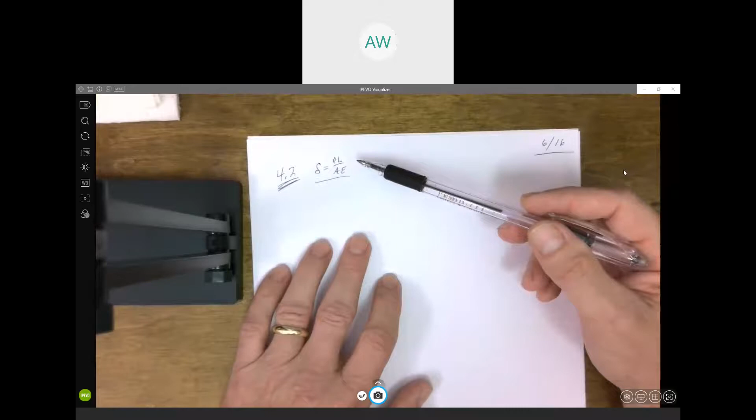All right, so now let's get back into mechanics and materials. This would have been Friday of last week before the test. In section 4.2, we were revisiting axial deformation in axially loaded members, and we came up with this formula: Delta equals PL over AE. That would be the axial or longitudinal deformation in an axially loaded bar. P is the axial load, L is the original undeformed length, A is the cross-sectional area of that member, and E is the modulus of elasticity. That's dependent upon the material.

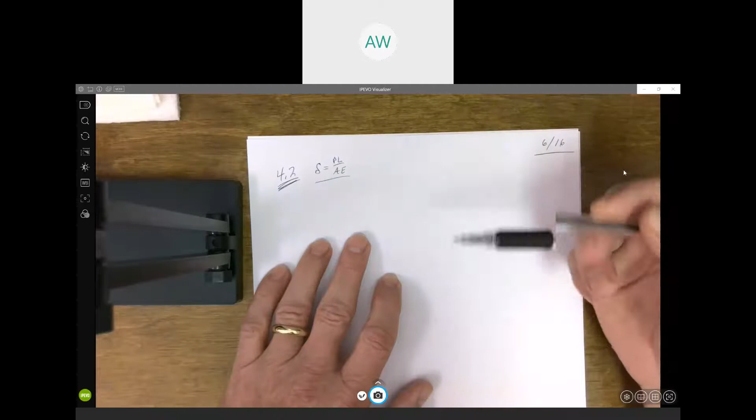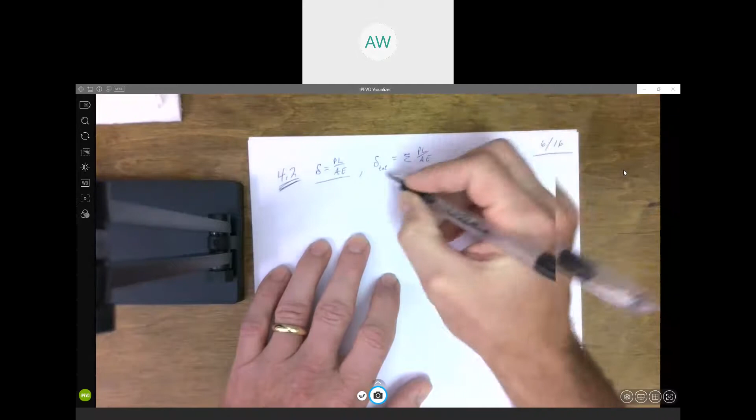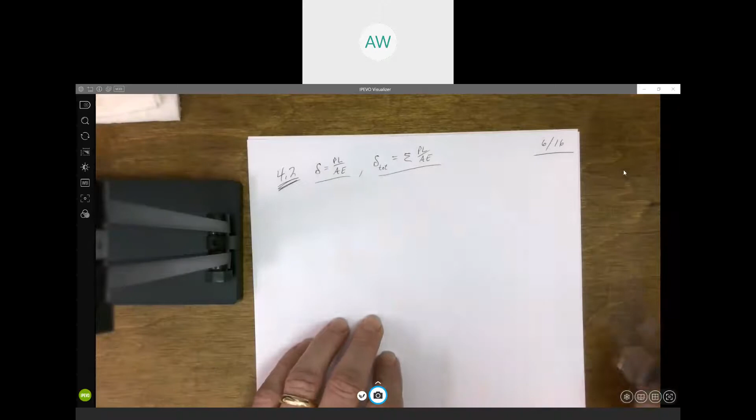Now if you've got a member that's got multiple loads or different cross-sections or different materials, we saw we would have to get the deformation of each segment or section and add those together. So to get the total we would sum those up for each section. And we went through and worked an example where we did that. So that's basically where we stopped. We're going to work one more example, a little bit different type, but still making use of this deformation formula, PL over AE. Any questions related to this before we work another problem?

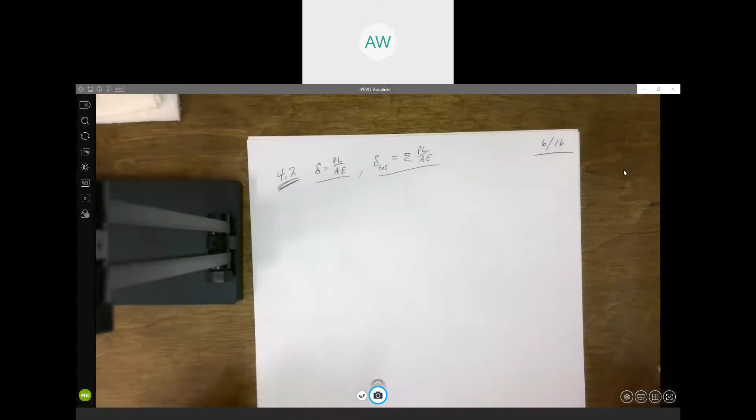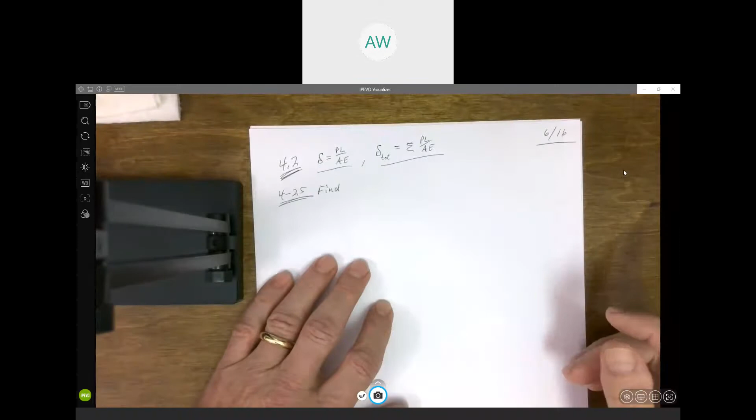Okay, so this problem we're going to work today is actually a problem I got out of your textbook. This is problem 4-25 in your textbook, and I'll draw the picture in a minute. But if you have your textbook there with you handy, you could open up and find what the picture looks like now if you want to. We're going to try to find the displacement at three different points, C, B, and E.

And we're also given some additional information. We're told that the rods BE and CF are a quarter inch diameter, A36 steel.

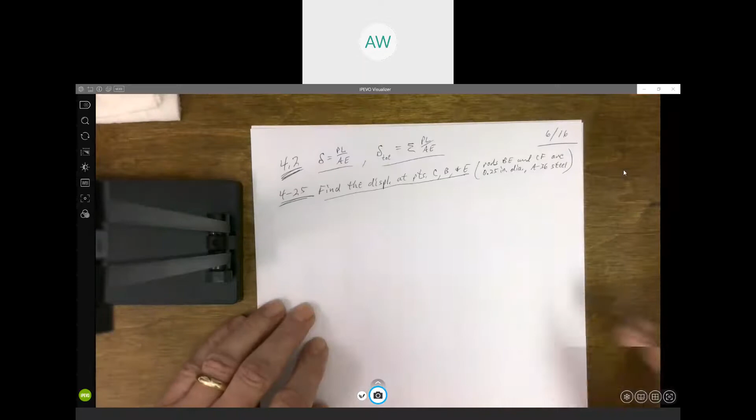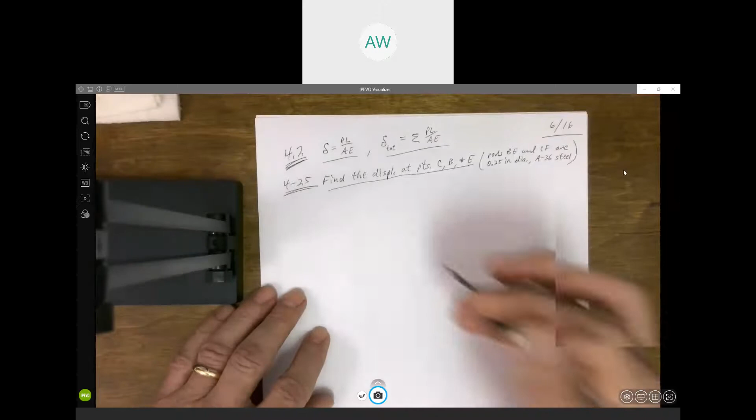All right, we'll come back to that information in a minute. Let me take a second and draw the picture. Looks like we've got four members there, all pinned together. We've got this vertical member, with a pin support at the top.

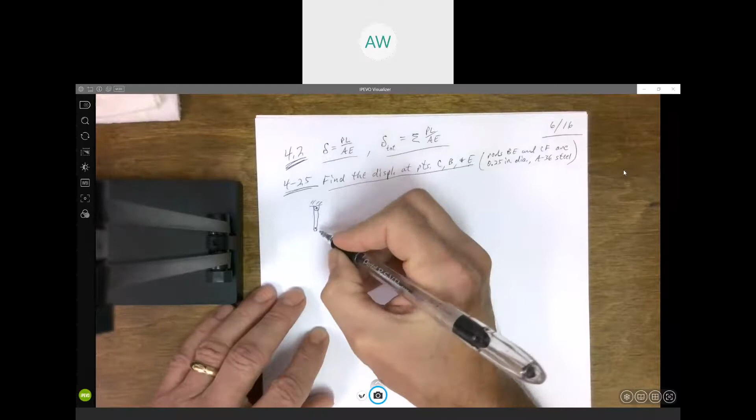And then we got this horizontal member, with a pin support at the right end. We've got another short member pinned to that that's vertical, and then that's pinned to another horizontal member. I can't draw straight lines today. And we got another pin support here. So let me label these and put some dimensions.

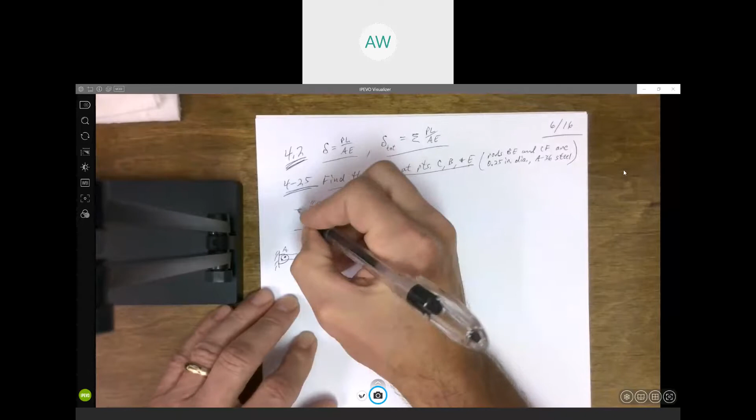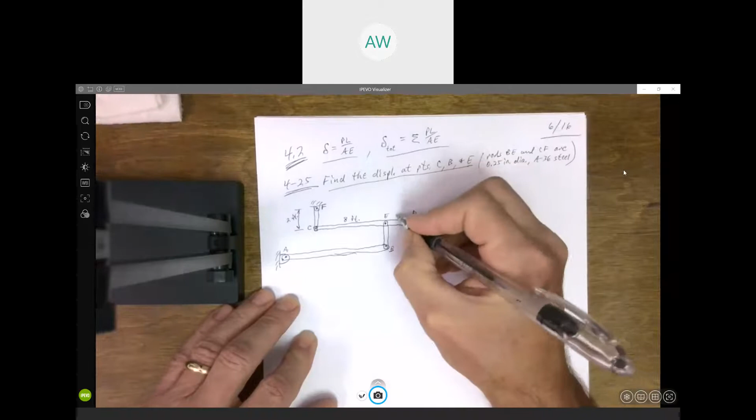This is AB. This is CD. This is joint E, and this is F. All right, so this is 2 feet. CF is 2 feet long. This is 8 feet from C to E, and then 2 feet from E to D. BE is 1.5 foot long.

And this bottom horizontal member, we've got a 5 kip force right in the center. This is 6 feet long. This is 6 feet long. So let me make sure I got everything labeled. I got all the dimensions, I think.

We're also told that these two horizontal members, DC and AB, are rigid. AB and CD are rigid. So these two horizontal members we're assuming are rigid. The purpose for that is in reality, those members would bend, and we haven't covered bending yet, so we're going to assume that they are rigid and don't bend. So these two horizontal members do not deform.

So any kind of deformation or movement we're going to have is due to the two vertical members, CF and BE, deforming. Those are not considered rigid. Also, just an observation here, looking at our structure, those two members, CF and BE, are two force members.

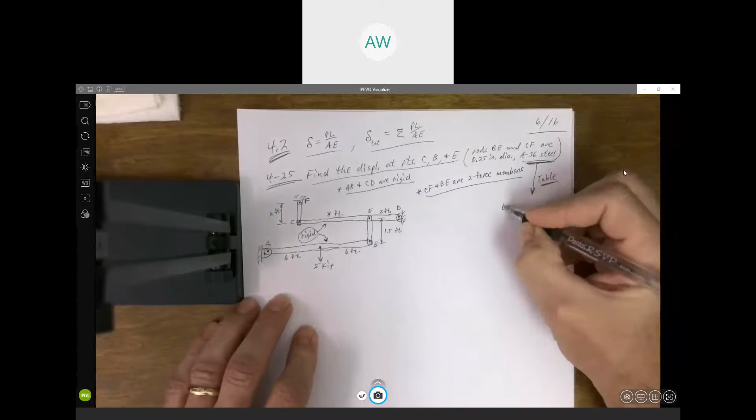All right, one other thing. We are not given the modulus of elasticity, but we are told what the material is. So this is a case where we are going to have to go to that table that's in the back of your book and get the value for the modulus of elasticity of A36 steel.

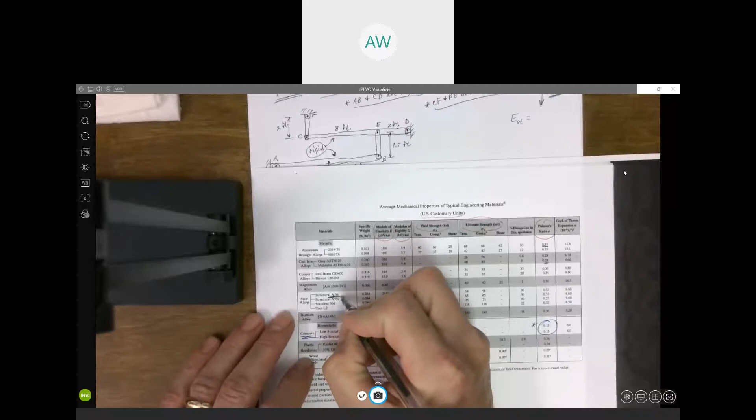Obviously, we're going to need that if we're going to apply this formula PL over AE. We need E. Now, this is the table that we were looking at in the back of your book. Obviously, these are English units, so we want to use the table for English units, and we're looking for A36 steel here. And we come over here for E, the modulus of elasticity is 29 times 10 to the third KSI.

Again, that's the value we got out of that table. So if you're not given the modulus of elasticity, reference that table in the back of your book to get what the modulus of elasticity is. All right.

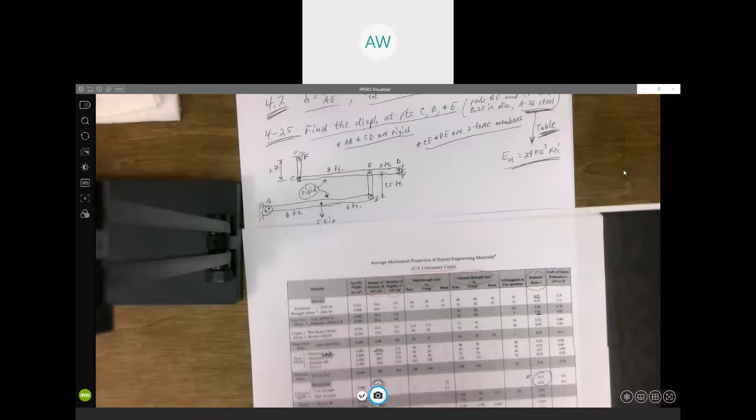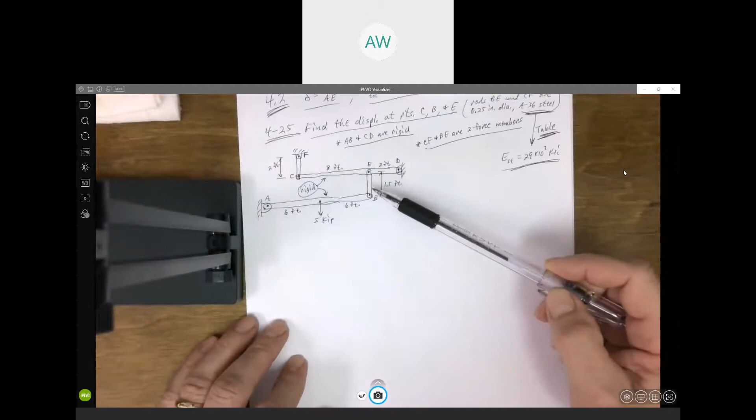So now I think that's everything we need before we start doing any calculations. So coming back to our problem, as I said a minute ago, any movement has got to be due to CF either stretching or compressing, or in BE either stretching or compressing. Those are only two members that can deform.

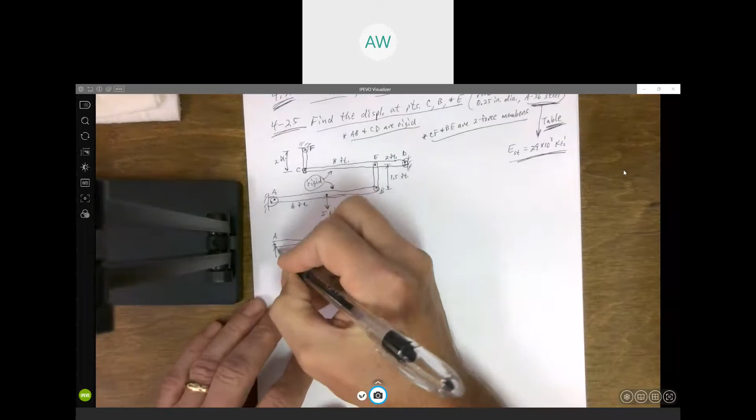So we need to know what is the force in member CF, what is the force in member BE. So let's just start by looking at this bottom member, AB. If we look at the free body diagram of AB, we've got support reactions here at point A. We got a 5 kip force applied here right in the middle. It's 6 feet, 6 feet.

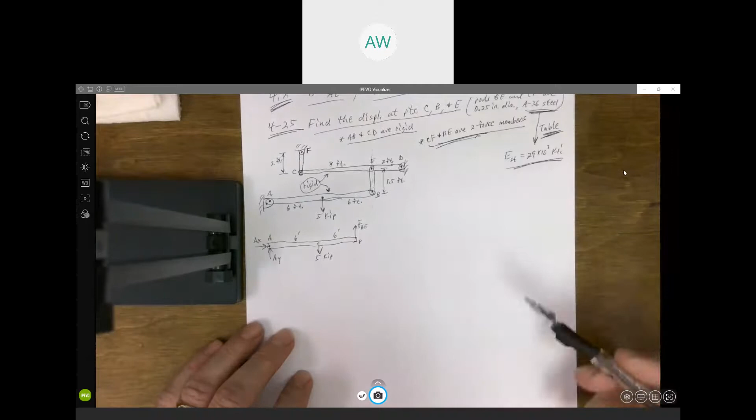BE being a two force member, I know that force, I'll call it force BE, it's going the same direction as a straight line that goes between E and B, which in this case is vertical, so it goes up. Could go straight down, but looking at my picture, I can tell you it's going to go up. But you could assume either way you want to. The sign will tell you if it's right. So all we need to do is just sum the moments about A.

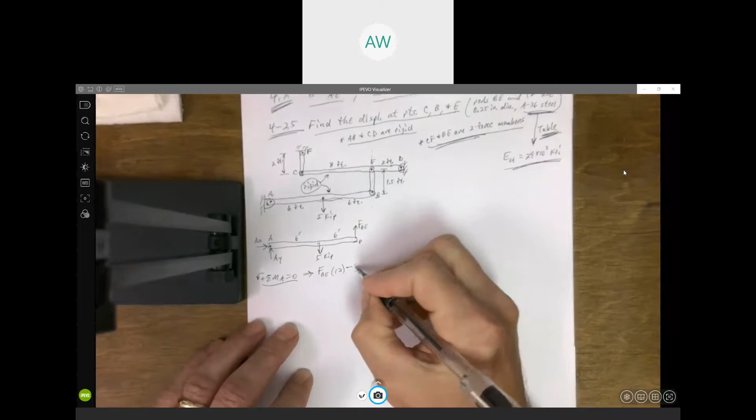Choose a positive direction, and we can find what the force is in BE. It looks like we're going to have force BE times 12 feet from A, causing a counterclockwise moment, a positive moment. The 5 kips causes a clockwise moment, so minus 5 times 6, set equal to 0.

And force BE equals 30 divided by 12, looks like 2.5 kips. It's positive, so I assume correctly it's in tension. So that's the force in member BE, 2,500 pounds, and it's in tension. It's going to get stretched.

Let's go ahead and find the force in CF while we're at it, then we'll come back and talk about displacements, because we'll need to know the force in CF also. Let's draw a free body diagram of the horizontal member up here, DC. I'm going to call this force CF, the force in member CF.

Here at E, this is where EB is attached, and we just found the force in that member is 2.5 kips. It's in tension, so it's going to pull down 2.5 kips there at point E. This is 2 feet, this is 8 feet. We've got support reactions here, Dy and Dx.

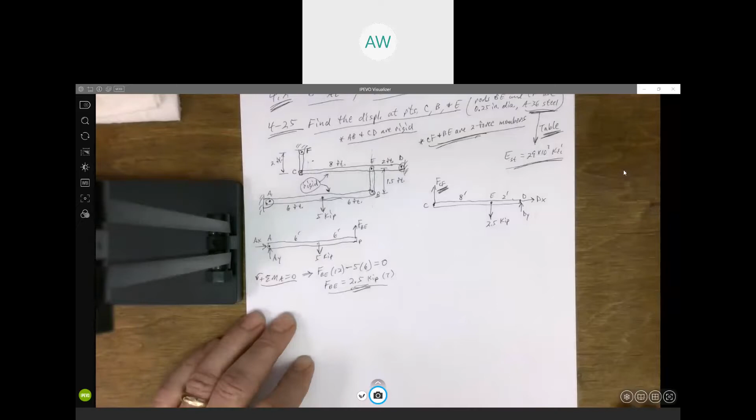What we're after is what that force CF is. Sum the moments about D, set that equal to 0, and we can find the force in CF. CF causes a clockwise moment, so minus force CF times 10, this distance from D. The 2.5 kips causes a positive moment, and it's 2 feet away. So 5 divided by 10 looks like force CF is 0.5, or 1/2.

It's in tension, so CF is being stretched as well. So at this point, we've done our statics and found the force in each of those two force members. Pause a second—any questions how we got our forces?

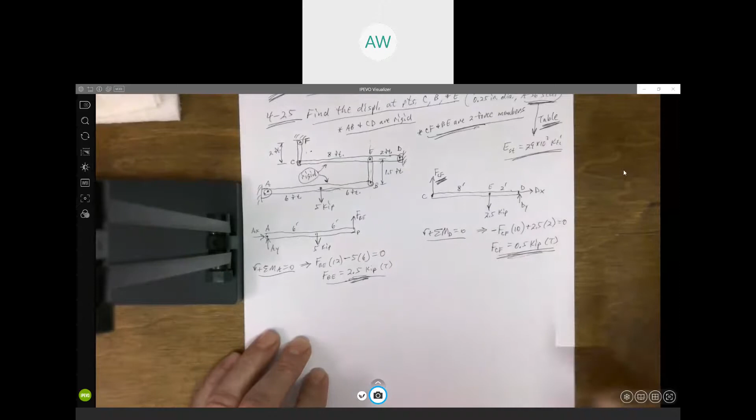All right, so with that, let's see if we can figure out what we're asked to find: the displacement at these 3 points. How far does point C here move? How far does point E move? And then finally B down here. That's what we're asked to compute—the displacement of those 3 points.

So let's start by looking at this top horizontal member, CD again. Remember, it is rigid. D is a pin support attached to the wall. Point D doesn't move. The only thing that's going to happen with this horizontal member CD is it will rotate about that pin support at D, since CF is in tension and being stretched.

Point C moves down, and that horizontal member CD rotates about that pin at D. Here's D. Remember, it's rigid, so it stays straight—it does not deform. So what's going to happen is C moves down from where it was located before the load is applied.

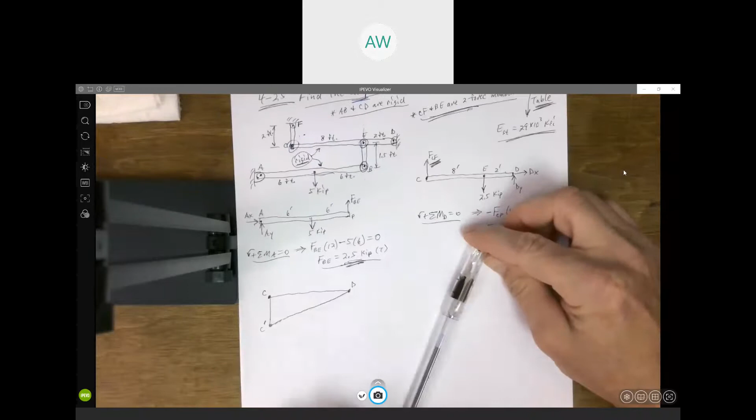And we've encountered this already. We're assuming for very small angles, very small deformation, that we're basically neglecting the curvature. In reality, this thing is going to swing around a circular arc, but if we only go this far, essentially that is going to be straight. So again, it's not the first time we've used it: we're assuming small deformation, which essentially means we assume this moves straight down and we neglect that curvature.

So what we're after, what we need to know is, what is that distance? How far does C move down? Well, C's going to move down however much member CF deforms. It's going to be the deformation of member CF, which is PL over AE for that straight member. So however far CF stretches, that's how far C is going to move down.

Well, we know what the force is now. We know P, we know L. We're given the diameter, so we can calculate the area. And we looked up E in the table. So let's just plug in our numbers.

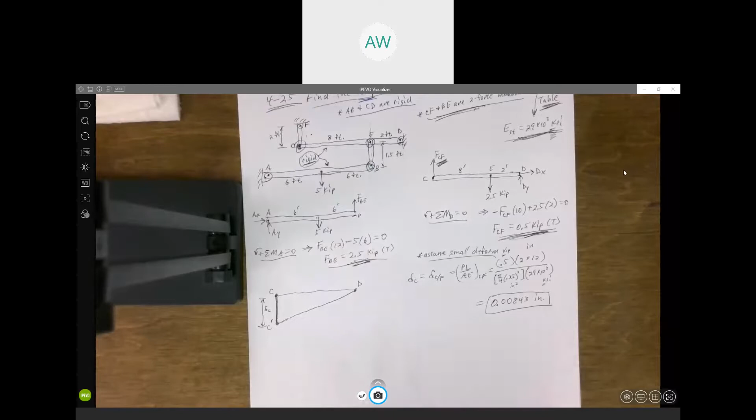This definitely reinforces our assumption that we're talking about small deformation. If you were looking at this with the naked eye, you might see it move, but you'd be hard pressed to measure that unless you had some really high-tech, sophisticated equipment. You definitely couldn't measure that by eyeballing it with a yardstick or tape measure. So we're definitely talking about small deformations. If this had come out to be like 84 inches, that's pretty much useless information because it would violate our assumption of small deformation.

Any question how we got the displacement of point C? Yeah, we're just getting how much CF stretched.

Now, to do point E, we can actually get that just from geometry. It doesn't require any mechanics of materials here. Still going on the same assumption. The E is going to move straight down. We're neglecting the curvature, and we want to know how far E moves. Well, we can get that a bunch of different ways just from the geometry.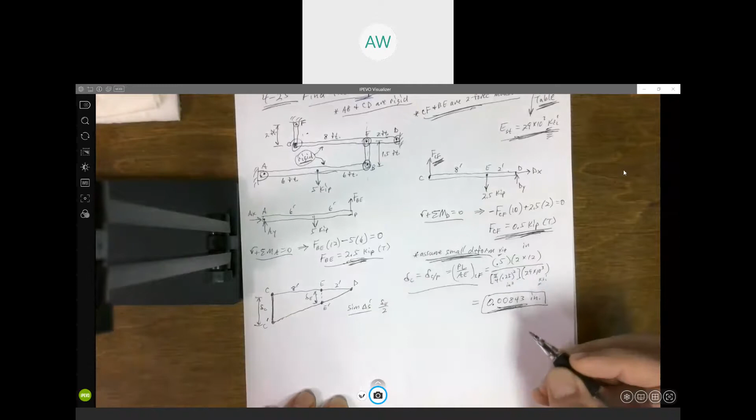If it's me, I would probably just use similar triangles. I know this is 8 feet from C to E, and this is 2 feet. So we could just do similar triangles. Delta E is to 2, as delta C is to 10. The ratio of this side to that side has got to equal the same ratio on this side to that side.

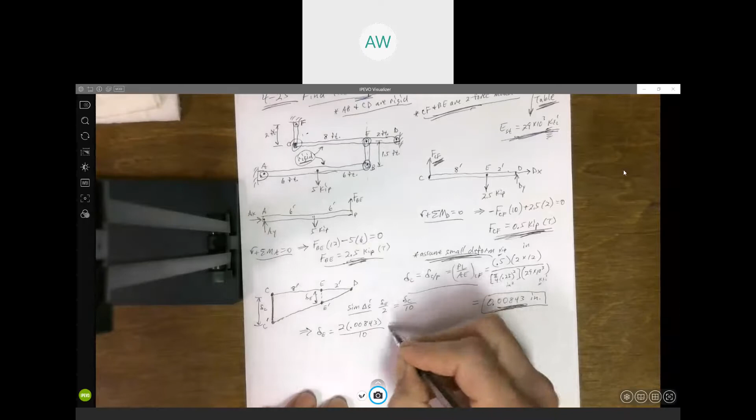So delta E, how much E moves, it's just going to be 2 times delta C, which we just calculated, which was 0.00843 divided by 10. And we're going to get 0.001686. I'll carry out 6 digits, but you could round that a little bit if you want to. That's how far E is going to move down, just from the geometry.

Assuming, again, CD is rigid, it doesn't deform or change shape. Any questions related to how we got the displacement of point E? It's going to go down. Again, both of these we're going down.

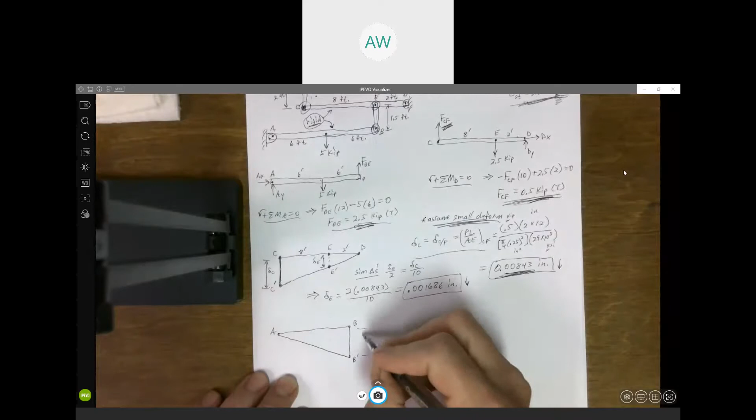All right, well then let's turn our attention to B. If we look at that bottom horizontal member AB, again, it's going to move down. We're pulling down on this thing. We're assuming it's really small displacement, so we're going to assume that it moves straight down. If I can draw a straight line here, AB is rigid, so it stays straight. And so we want to find this distance: how far does point B move down?

Here we got to be a little bit careful because B is going to move down for 2 reasons. One, it's going to move down simply because point E moves down. When this horizontal member up here rotates down, point E moves down, that's going to move EB down. So it's going to go down however much E moves down.

Plus, it's also going to move down due to how much EB stretches. We found the force in BE up here, it was 2.5 kips, and BE is not rigid, it's going to be stretched. So it's going to move down also however much BE stretches. So we're going to take the displacement of E and add the PL over AE for section BE. Everybody with me conceptually here, why B is going to move down - not only how much BE stretches, but also the top of BE is moving down this amount already. So we add those together, and that's how far B moves down.

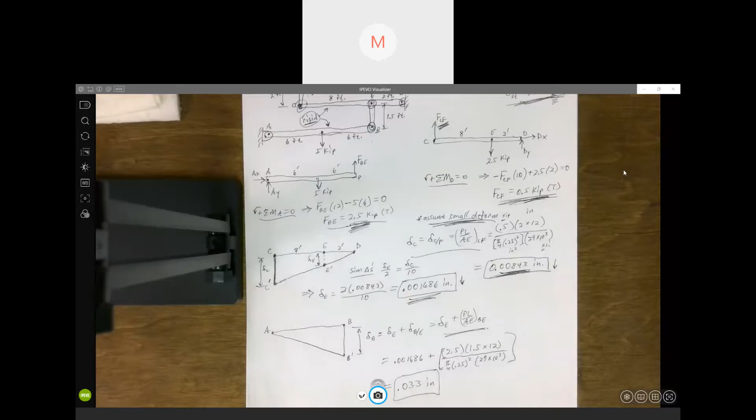Mr. Walters: why don't E and B move the same distance? Because B is moving the same amount E moves, plus BE is going to stretch.

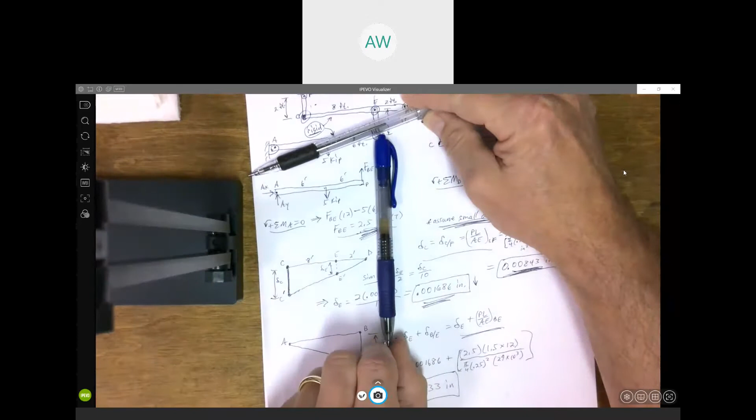So if you're looking at point E here, it's going to move down because DE rotates. But if this is member BE, it's being pulled in tension, so it's going to stretch. So this end is going to move more than that end. The top is just going to move however much E moves down, but this bottom part is also going to move down due to that member being in tension and stretching and getting longer.

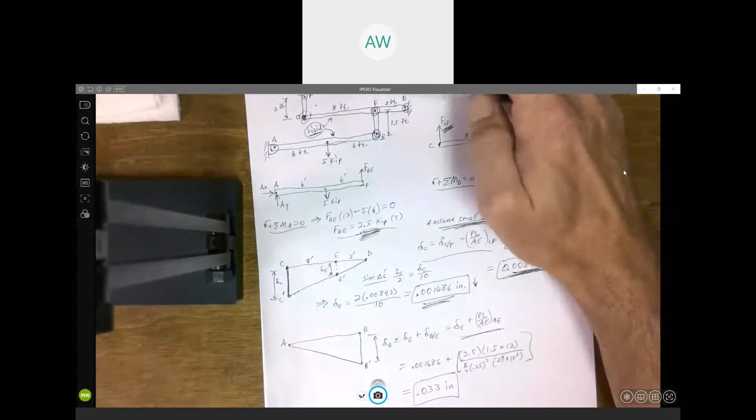Does that make sense? Yeah, I got it. Thank you. All right, other questions about this one?

So again, this was what's in section 4.2. It's applying the PL over AE to axially loaded members.

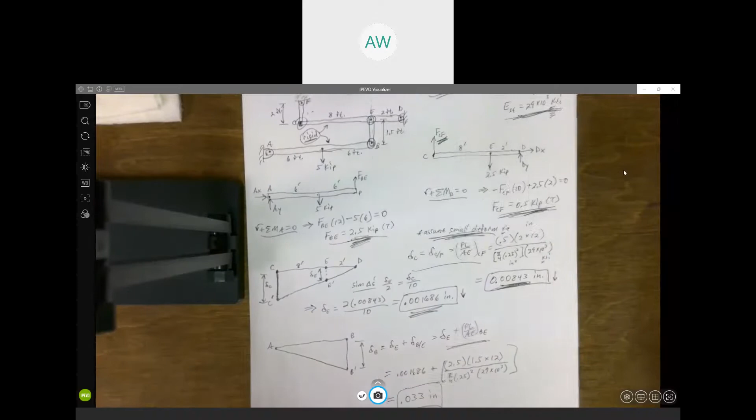The next topic we're going to talk about, you're going to find in sections 4.4 and 4.5 in your textbook. We're going to talk about what we call statically indeterminate axially loaded members.

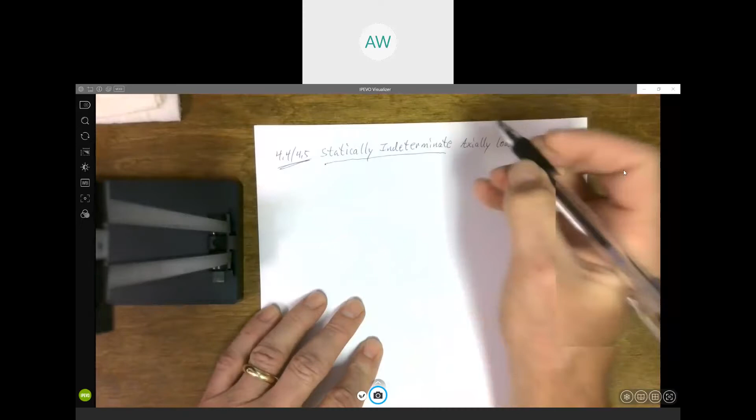So a new term that we haven't encountered in this class yet is what we call statically indeterminate. Basically what that means, if it's statically indeterminate, means it cannot be determined by statics alone, by using only statics. And by that, I'm referring to our equilibrium equations.

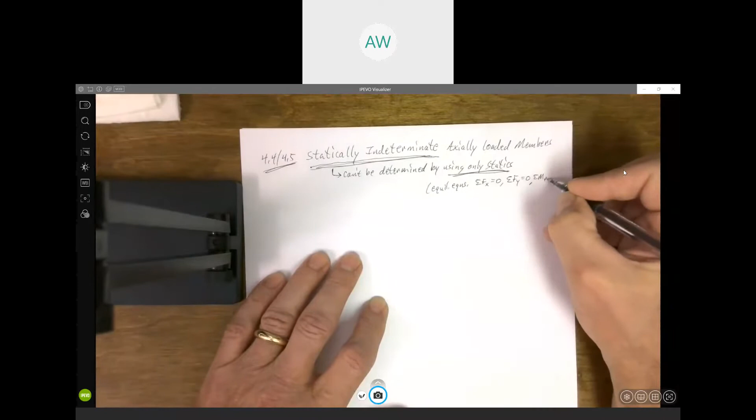There are three of them. Sum of forces in the x equals 0. Sum of forces in the y equal to 0. Sum of the moments about a point equals 0.

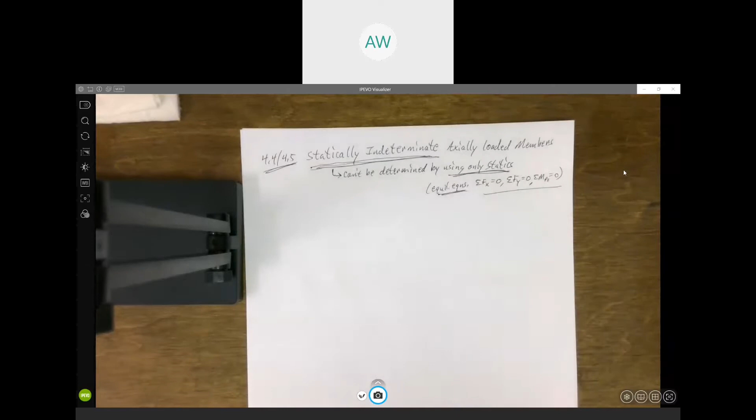So that's what it means. If you've got a structure that's statically indeterminate, means you can't solve it. You can't find all the support reactions or the force in any cables or bars that are supporting this thing using just those three equilibrium equations.

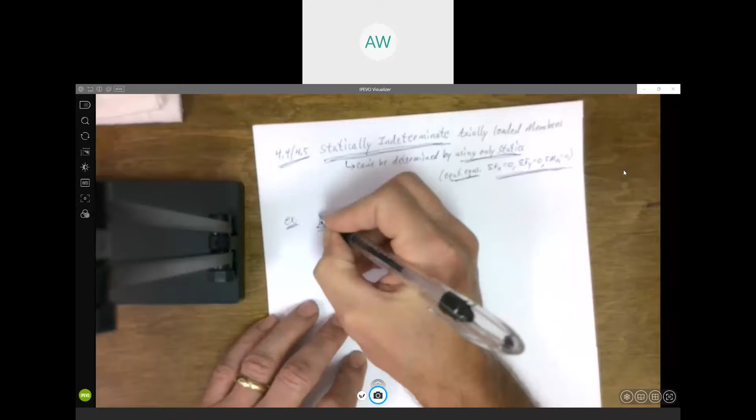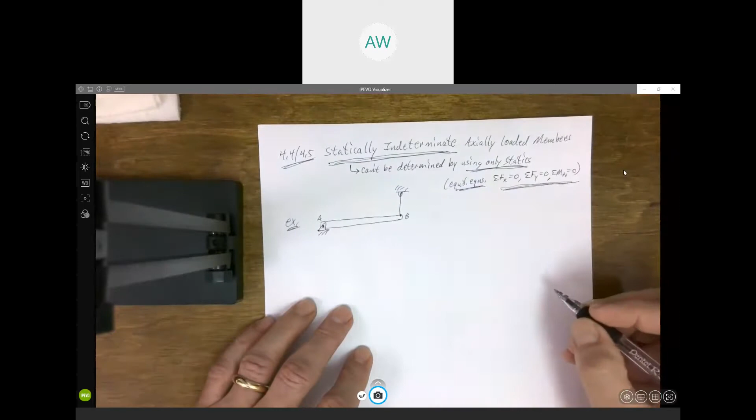Now, an illustrative example, again, we're not going through and solving this yet, just to illustrate the point. Let's say we have this bar, and we got a pin support here at A, and maybe we got a cable attached to this. We'll call this B. And let's apply some force F, so we're pulled down on it.

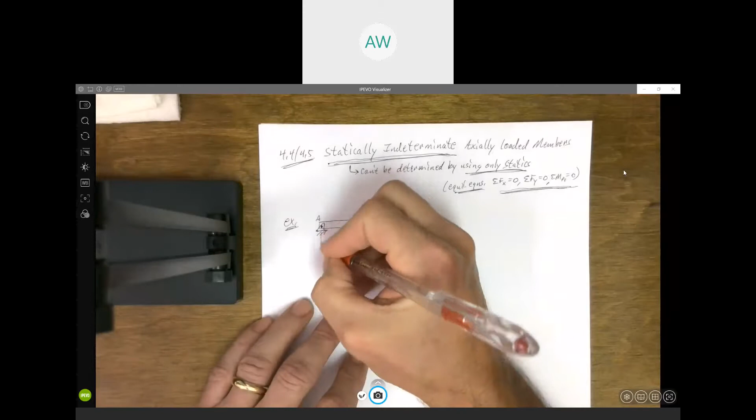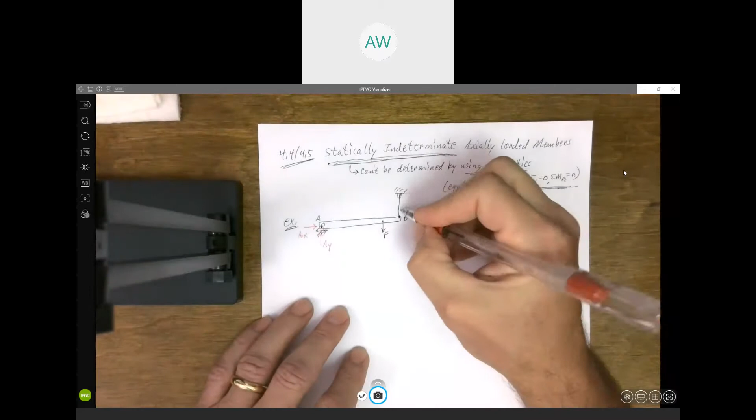Now, you've solved problems like this before. This is what we call statically determinate. You can solve this using just statics. You got support reactions here: at A, you got pin support, two unknown support reactions. You're going to have some force in this cable, we'll call it FB. Three unknowns, three equations, three unknowns. You can solve that.

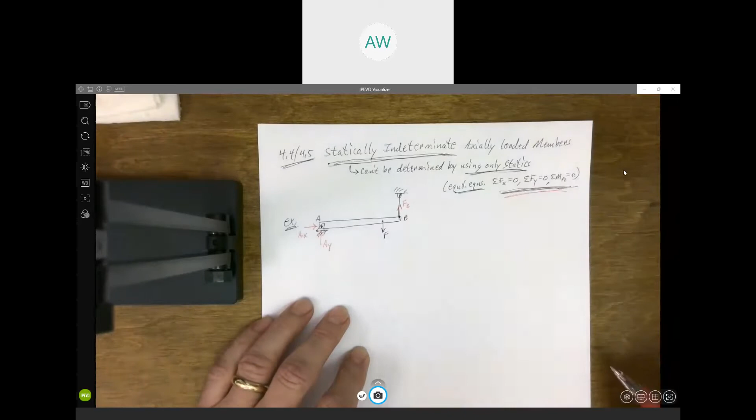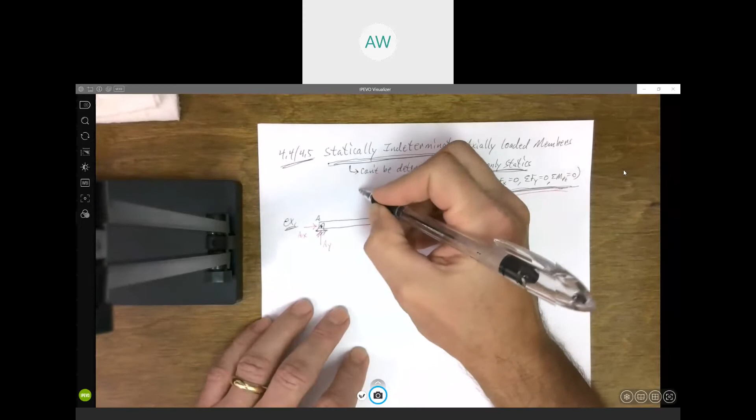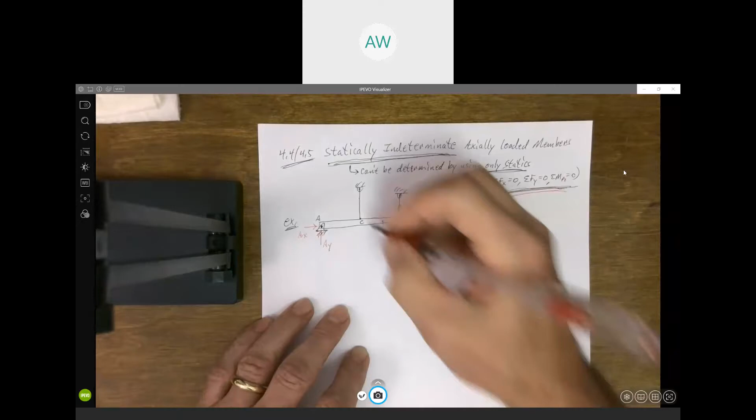But what if we add another cable? What if, in addition to that cable, we come out here and attach another cable? We'll call this point C. Well now, there's going to be some force in that cable as well. Well now how many unknowns do we have? Four. Right, so we got four unknowns.

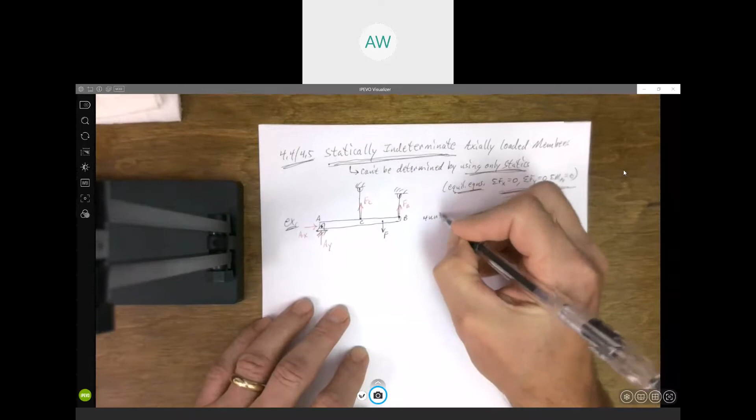There's only three equations. So unless you invent some new form of math, you cannot solve a system of four unknowns and three equations. You've got to have the same number of equations as you have unknowns to be able to solve that mathematically.

Now, I'll caution you, one of the most common things I see students do wrong when they encounter a problem like this is, well, they'll sum the forces in the x direction, set that equal to 0, you get AX. Sum the forces in the y equal to 0, you're going to have 3 unknowns. Sum the moments about A, you're going to have 2 unknowns. So what a lot of students do at that point is, well, they need another equation, so they go sum the moments about a different point.

That does not work, right? If you sum the moments about another point, you are not going to get an independent equation. You're going to get a multiple of one of the three equations you already have. You don't get a new equation by summing the moment about a different point. But I see students repeatedly do this, even though I try to enforce that and tell you not to, it doesn't work. I see students do it all the time.

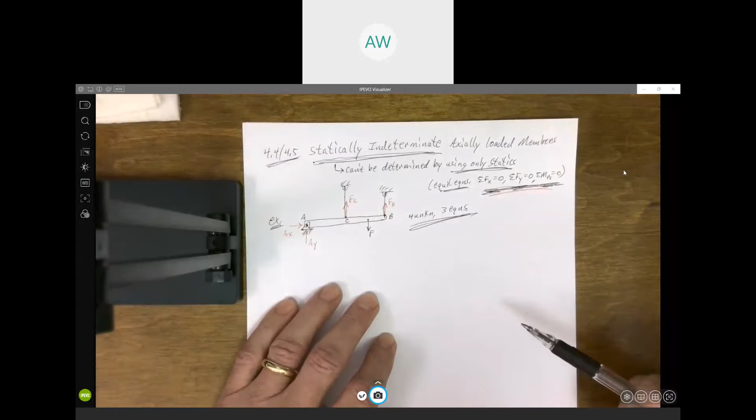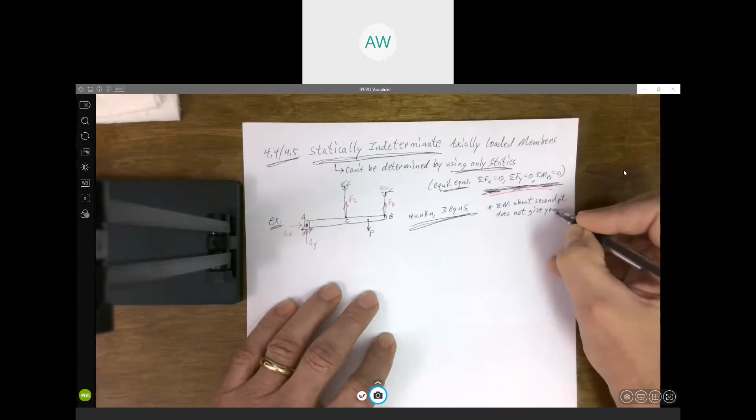Now, a lot of times what they'll do, they do something wrong, and so they actually get an equation that gives them an answer. The answer is wrong. If you do the math right, you'll wind up with something like 0 equals 0, or 10 equals 10, or something like that. That's useless information. So remember this: summing the moments about, say, a second point does not give you an independent equation.

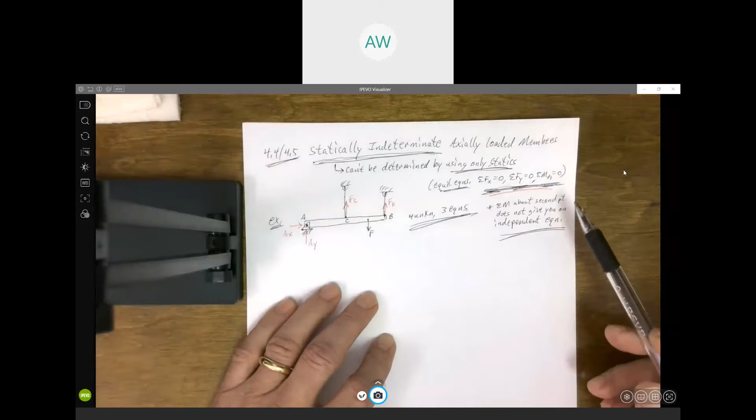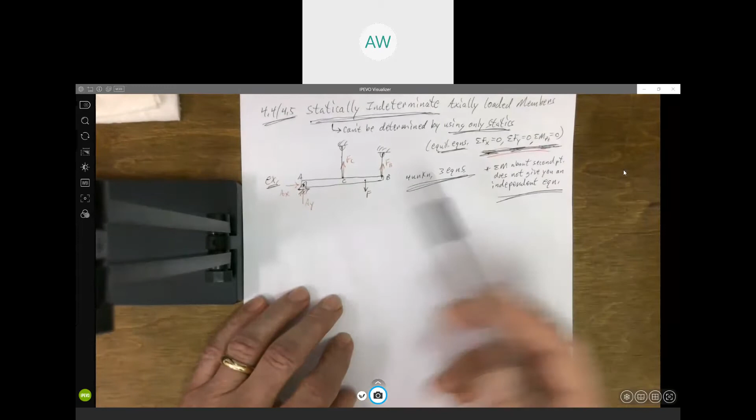You've got 3 equations to work with, and that's it. If you have more than 3 unknowns, you can't solve it using statics. That's one way you get a statically indeterminate problem - more than 3 unknowns. You could add more supports and wind up with 5 or 6 unknowns. You'll never get there with those 3 equilibrium equations.

Now, another way of getting a statically indeterminate situation is not having more than 3 unknowns - it's just the way it's configured. You may not have more than 3 unknowns, but those 3 equations just aren't sufficient to solve it.

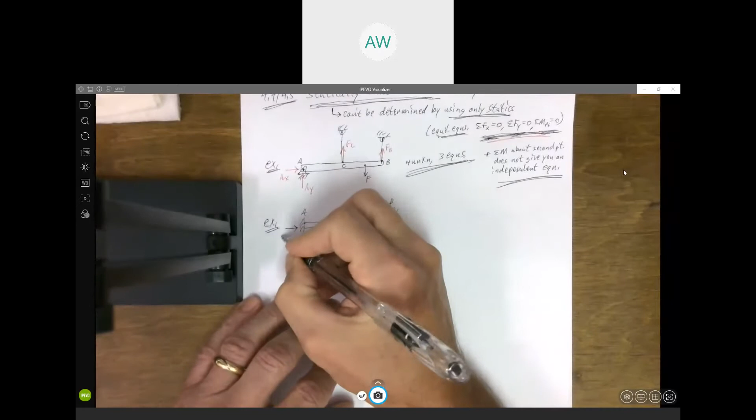Another illustrative example: say we've got this bar fixed at each end, and let's apply some force F here in the middle. We're going to have some horizontal reaction force. Technically, if it's fixed, you'd also have a vertical reaction force and a moment, but if we neglect the weight and assume this is the only force applied, those would be 0 anyway.

Just taking those into account, you can't solve this using statics. You don't know what AX and BX are. You could sum the forces in X equals 0 - actually we only got 2 unknowns here, right? We don't know AX, we don't know BX.

Well, if you sum the forces in the X, what you get is AX plus BX plus F equals 0. You've got that equation. That's good, but your other two equilibrium equations tell you nothing.

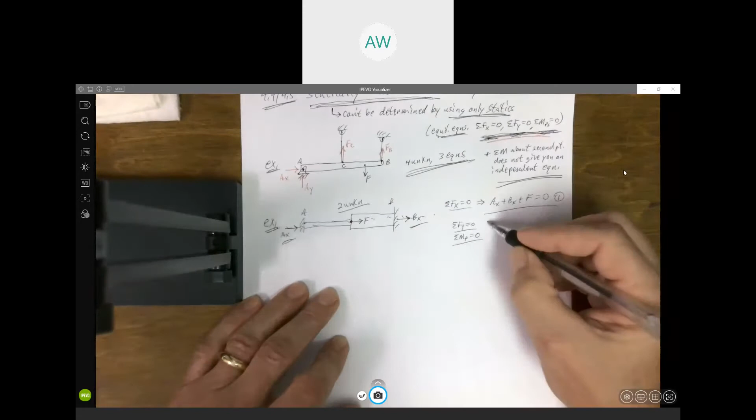Sum of forces in the Y equal to 0 - there are no forces in Y. Sum of the moments about, pick whatever points you want to set equal to 0 - they're all collinear, all these forces act along the same line. Those give no help at all.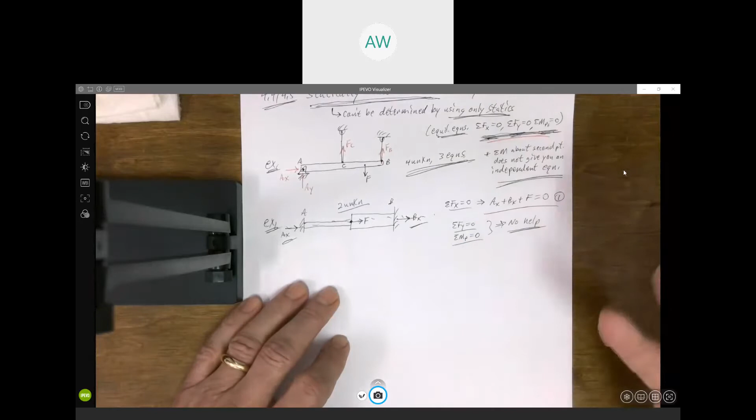So we've got 3 equations and 2 unknowns, but the 3 equations we have are not sufficient to solve that. It's statically indeterminate. So that's 2 illustrative examples of how we could arrive at a statically indeterminate problem.

But have no fear, we can still solve this. This is actually going to be learning something new - you didn't see these types of problems in statics. Everything you solved in statics was statically determinate. You could solve it.

Solving this type of problem requires both statics - and by that I'm talking about our equilibrium equations - we're still going to have to use these equilibrium equations, but we've got to have something else. That's not sufficient by itself. So solving it requires statics and what we know or have learned so far in mechanics of materials.

And by that, I'm talking about deformation. This is what he refers to - you'll see this terminology in the book - he calls it compatibility equations.

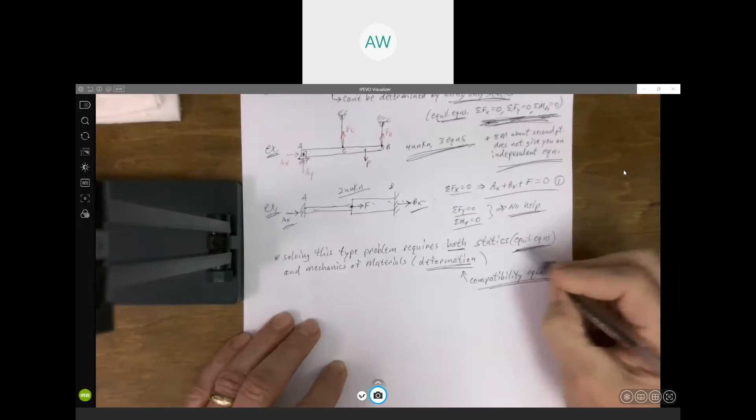So it takes a combination of both statics, our equilibrium equations, and what we know about deformation. If you go back to this first example, we got 3 equations. If we had another equation, we could solve that. Well, where we get that 4th equation is by what we know about deformation. Remember delta, we're going to be using that same formula, PL over AE. So if I can get a relationship between the deformation in these 2 cables, that's where I get my 4th equation from.

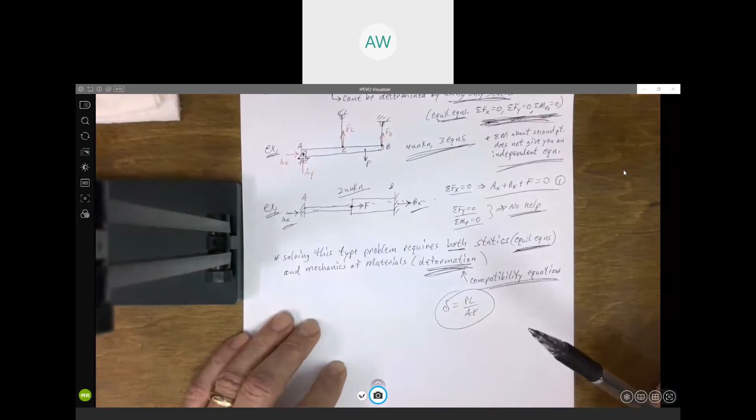That's kind of the general theme. All these problems are going to use applying your equilibrium equations, taking what we just learned about deformation, and getting some relationship between the deformation - that's where we get the extra equation that we need. And now we're able to solve it.

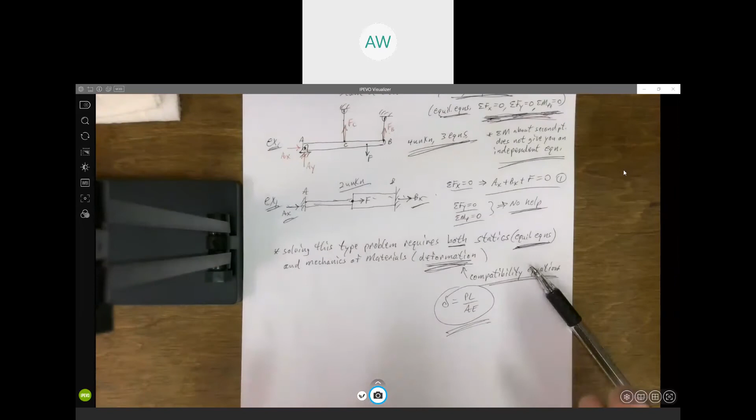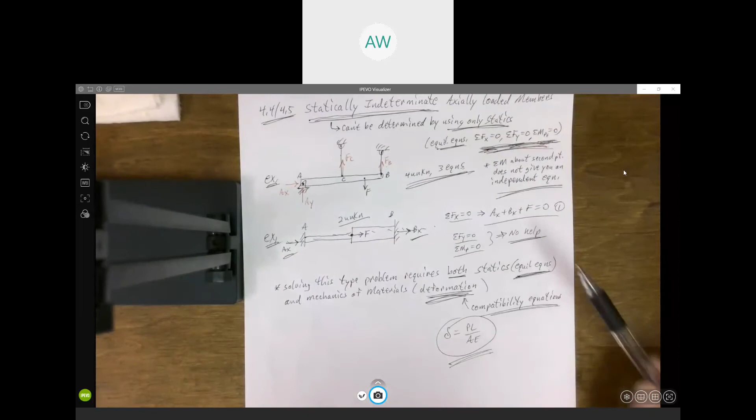All we're doing is combining 2 things you already know: how to apply equilibrium equations you learned in statics, and how to calculate the deformation, which we just learned in mechanics of materials. We're just going to combine those 2 things. So there's nothing new in this section - no new formulas to worry about. It's just applying what you already know to problems like you haven't solved before.